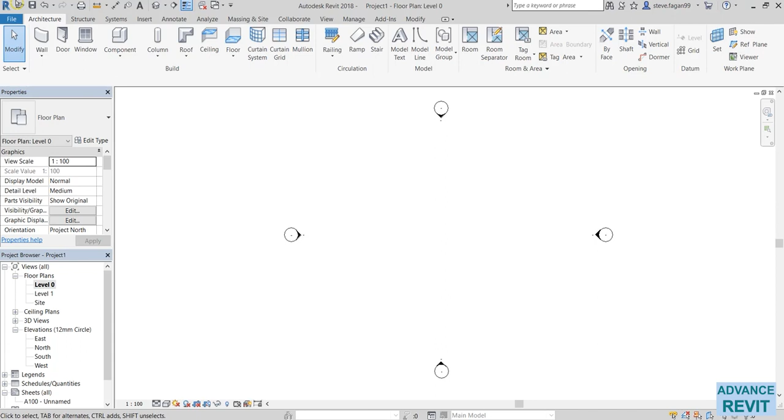Now we're going to look over the properties of a wall. So we'll select our wall tool, and we can look here in the properties section. The first thing we see is the type selector. So if we hit the arrow, this is where we'll select the type of wall which we want to draw.

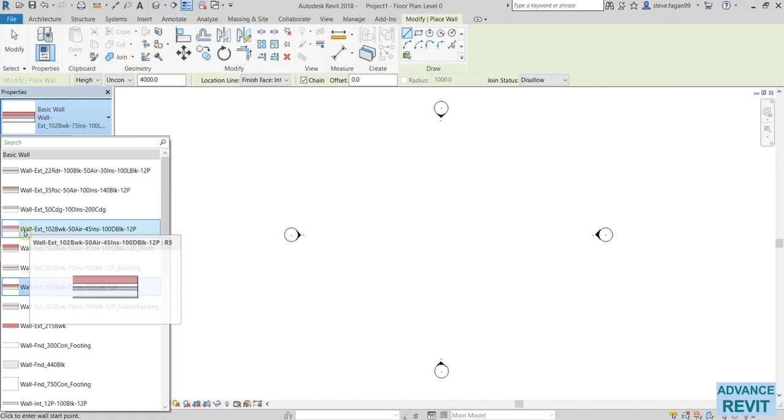So there's lots of different variations in here that are provided to us by Autodesk. You will be creating your own wall types in the future, but as a good basis and a good start point, it's great to get to know the wall types provided by Autodesk. So if we select the wall exterior, 102 brick, 50 air cavity, 45 insulation, 100 block and 12 plasterboard, then we can draw our wall.

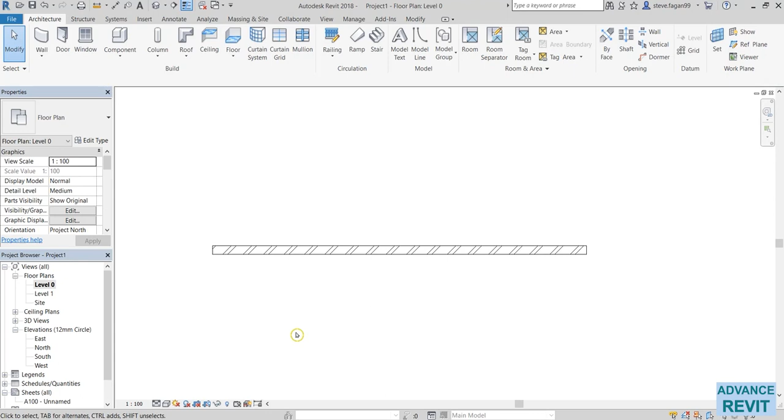With Revit, once you've drawn the wall, we can always go back and revise it and change the type that we've drawn. So if we simply select it again, hit the type selector, and we can change the type. So at any point throughout our modeling process, we can change the wall type. Once we have the wall selected, the properties palette will then take on the properties of that wall.

So the first heading is the constraints. Our first one is the location line. So it's currently set to finish face interior. So now we have a better understanding of what they are, so we're able to change that now if needs be.

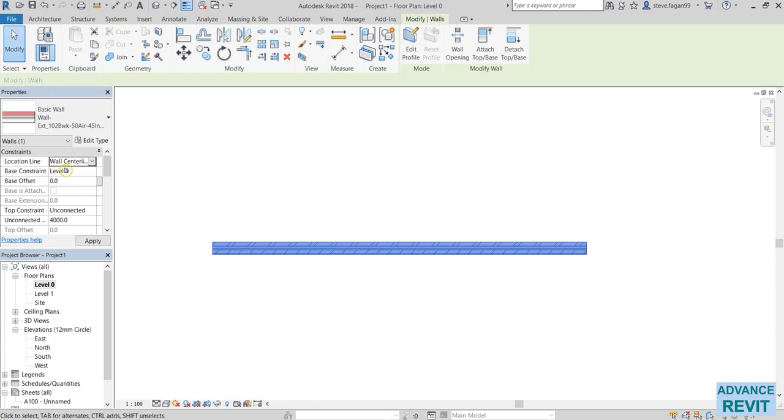We then have our base constraint, which is set to level 0. So again, if I open up our east elevation, you'll see our base constraint level 0. It's on level 0. The next option is base offset, set to 0. So it's sitting on level 0. We can add in an offset. So if I add in 200, you'll see that our wall has offset up level 0 by 200. Bring that back to 0.

When we make a change in the properties palette, the effects will not take place until we either press apply or move the cursor into the drawing. The reason is we can make multiple changes in the properties palette before everything takes effect. It's just a quicker way of doing things, because if we were to do multiple things and the model was updating each time, it would delay the process.

So next is the top constraint, which is currently set to unconnected. Here we can select it and revert it back to level 1. Again, moving my cursor into the model, you'll see the wall will now be constrained to level 1. Again, we have an offset, so I can add in an offset of 200. It's now offset above 200. If I add in a negative figure, it will go below the line.

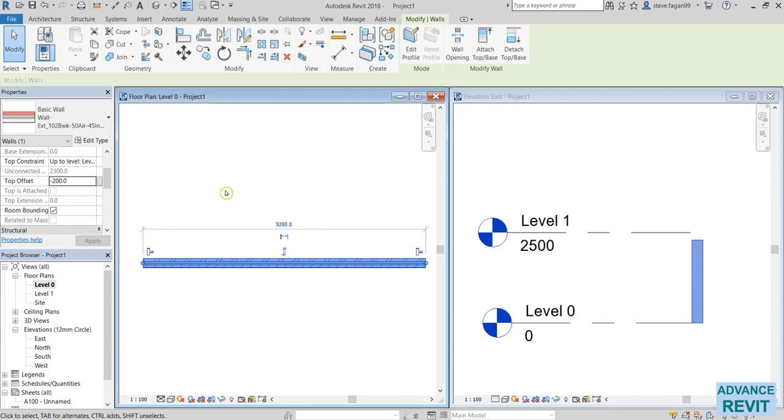Next is the dimensions heading. So it will give us a length figure as well as the area and volume of that wall.